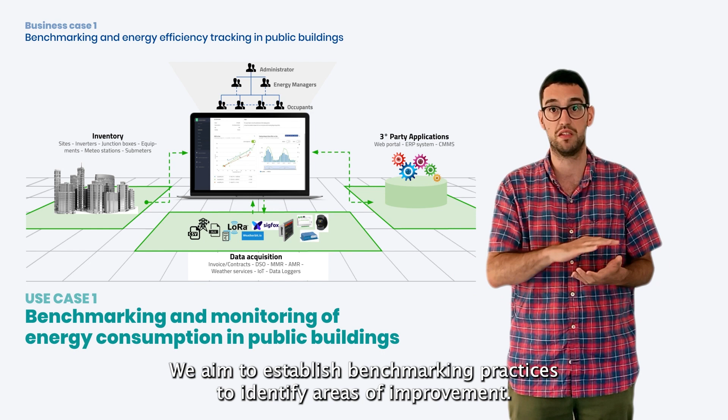To achieve our objectives, we have divided the goals of this business case into two different use cases. Use case 1 is called benchmarking and monitoring of energy consumption in public buildings, in which we compare buildings based on their energy consumption. We aim to establish benchmarking practices to identify areas for improvement.

Use case 2 is about energy efficiency measure registration and evaluation. Here, our focus is on building a repository of energy efficiency measures to evaluate their impacts on achieving energy savings. We want to ensure that the implemented measures yield the desired results.

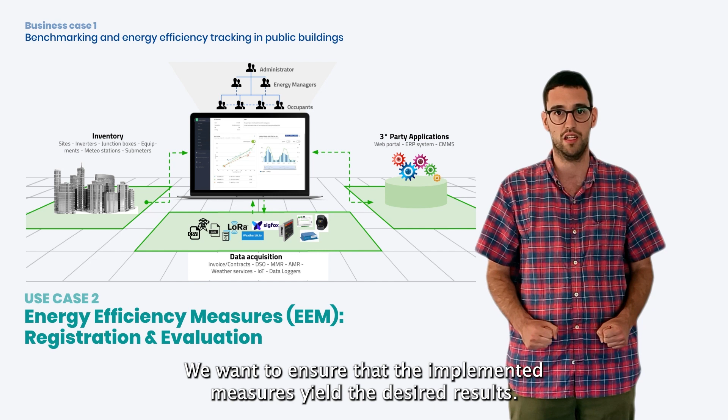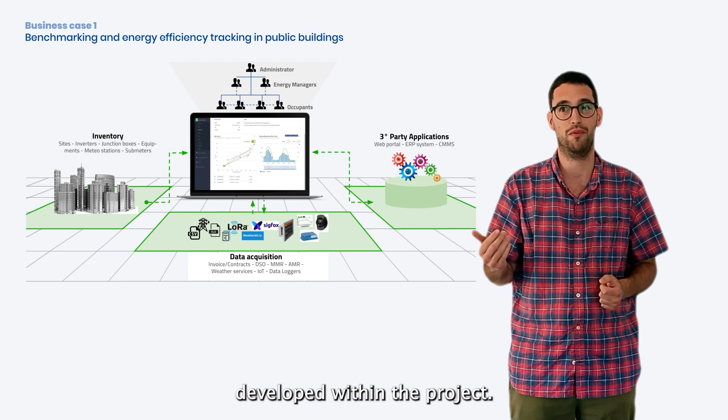Key features of these business cases include an open big data infrastructure to consolidate all building data in a single location and enable performance monitoring, building energy benchmarking utilizing the data developed within the project, and continuous data collection from various sources, including energy consumption, investment in energy efficiency measures, and user information.

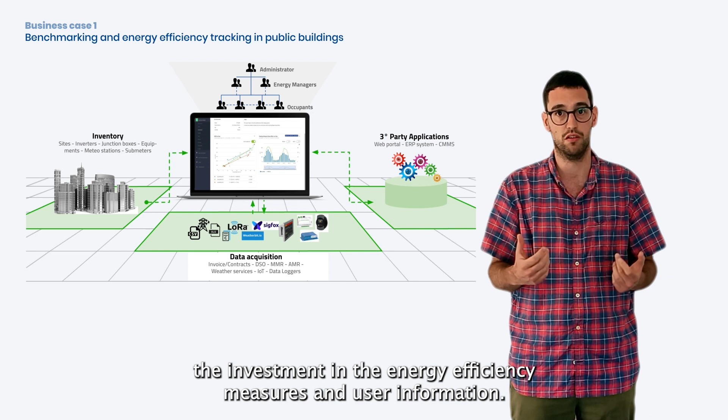The main actors who interact with the energy management tool are around 100 energy managers.

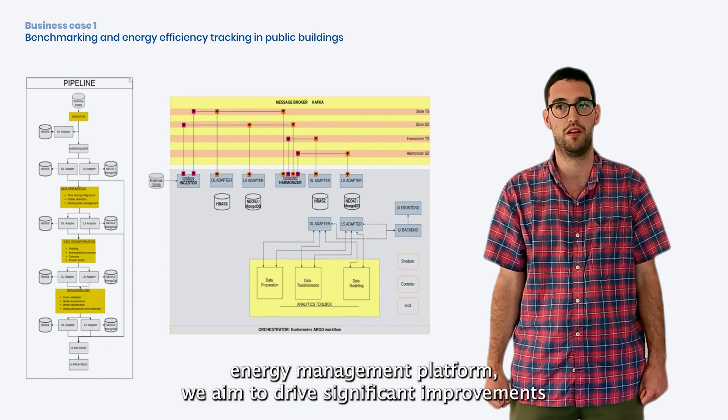By leveraging these resources and implementing our comprehensive energy management platform, we aim to drive significant improvements in energy efficiency within the public sector of the Catalan Government. Thank you for joining us on this journey towards more sustainable and efficient buildings.

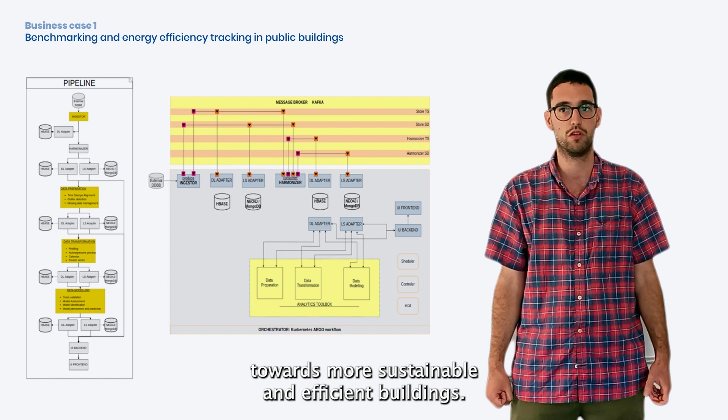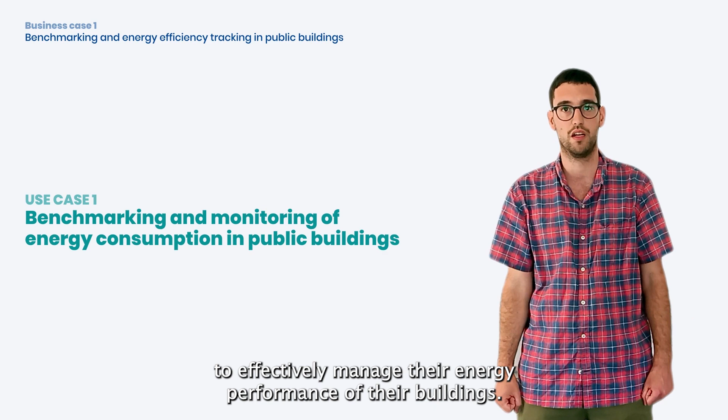In this use case, the overall objective is to provide public authorities and energy managers with a platform equipped with automatic tools to effectively manage the energy performance of their buildings. The key target is to process a significant amount of data from various databases and sources, providing qualified and useful information to enhance decision-making processes in building energy management.

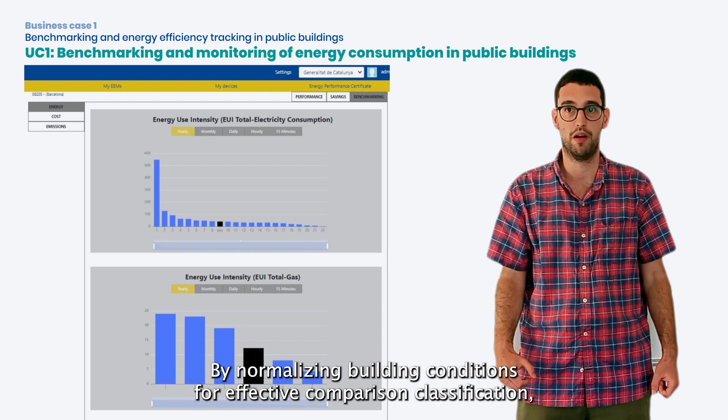One of the tools offered is energy performance benchmarking. By normalizing building conditions for effective comparison and classification, energy managers and public authorities can monitor the energy performance of their buildings and gain insights into why some buildings consume more or less under similar conditions.

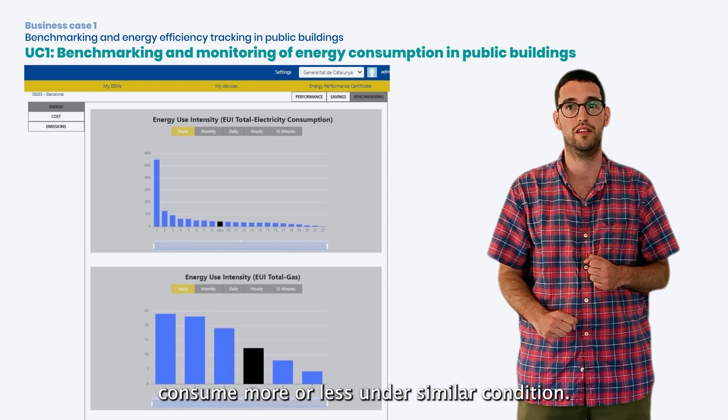Another valuable tool is the analysis of trends in building energy performance. This feature showcases the evolution of building performance indicators, enabling energy managers to track improvements or worsening trends over time. It helps evaluate the real impacts of energy efficiency measures and identify and rectify any deteriorating situations within a building.

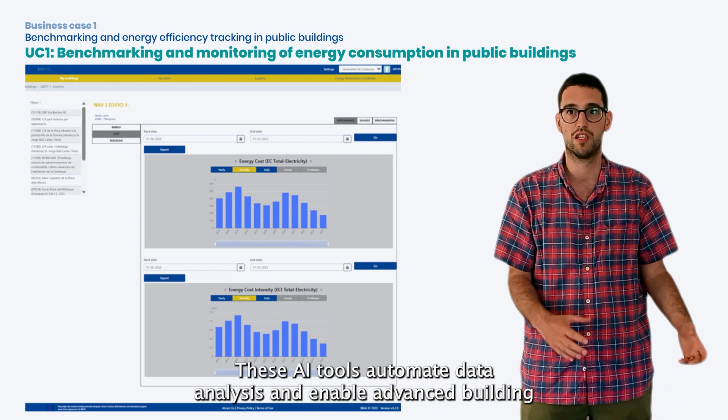A centralized data repository has been created to improve buildings' energy management. This repository includes energy consumption data, building properties, energy performance certificates, and more. This data feeds into AI tools developed during the BIGG project, which automate data analysis and enable advanced building benchmarking, simplifying decision-making processes for energy managers.

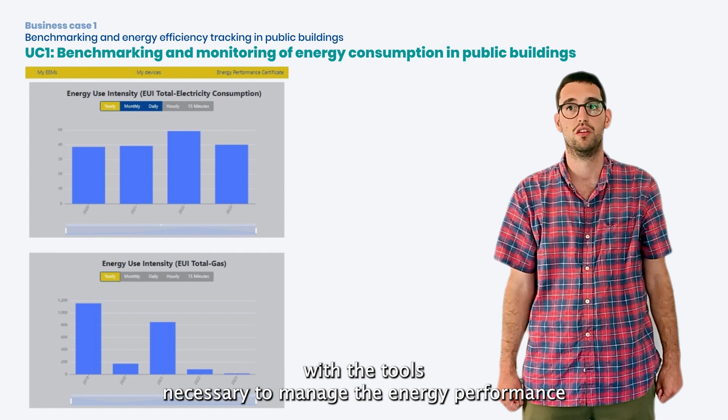Through the BIGG project, this technical solution empowers public authorities and energy managers with the tools necessary to manage the energy performance of their public buildings more efficiently and effectively.

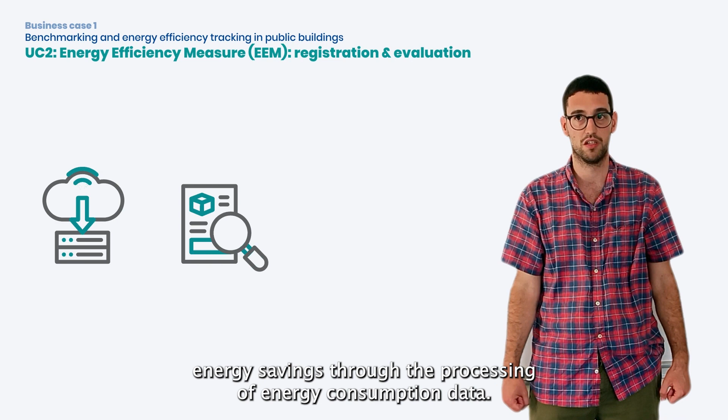In this case, our primary goal is to build a structured database that stores energy efficiency measures and evaluates their impact on achieved energy savings through the processing of energy consumption data. This database also includes an easy-to-interact interface for building and energy managers.

By implementing this database, we expect to obtain more detailed information on energy efficiency measures by registering the data in a structured manner. This will enable us to capture and map information on improvement actions, enhance statistical analysis of registered energy efficiency measures to extract valuable insights for informed decision-making, and improve the accuracy of savings evaluation.

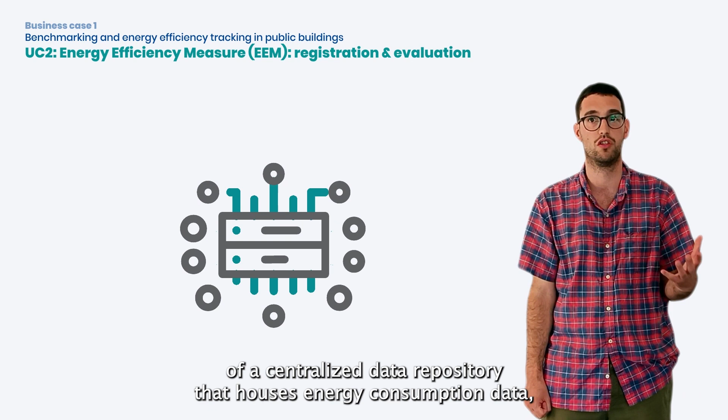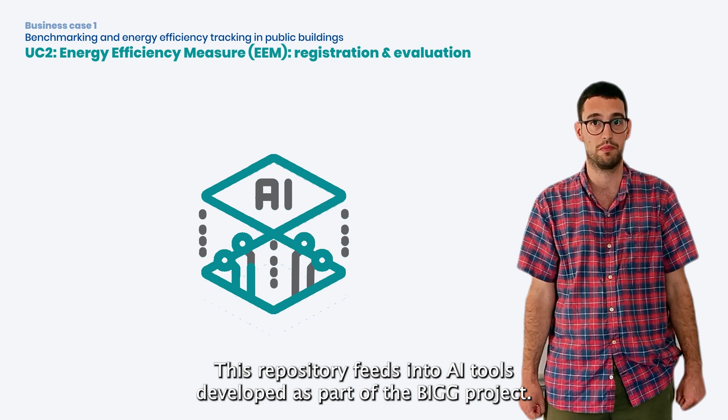To achieve this objective, our technical solution involves the creation of a centralized data repository that houses energy consumption data, building properties, energy performance certificates, and other relevant information obtained in use case 1. This repository feeds into AI tools developed as part of the BIGG project, which automate data analysis and enable advanced building benchmarking, facilitating decision-making for building and energy managers.

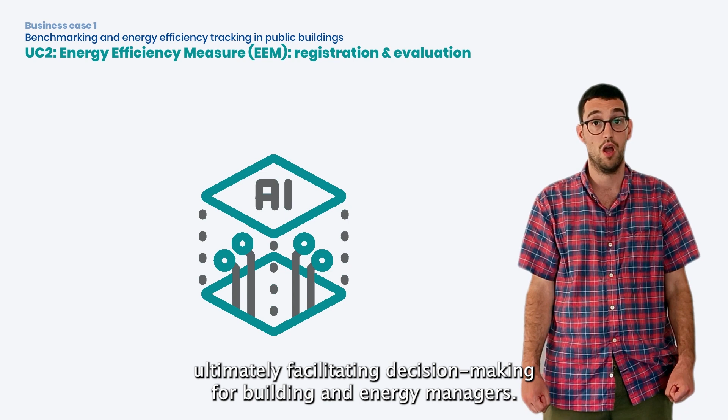We are proud to share that our project has already made significant progress in how information is gathered, stored, and processed. This progress is particularly evident in the case of energy efficiency measures data collection.

Our organization, ICAEN, is responsible for promoting and tracking energy savings in publicly owned buildings, mainly of the Catalan Government and the depending public entities.

Previously, gathering this data was a daunting task that involved handling hundreds of energy managers, encouraging them to provide the data and ensuring that they recorded it properly. Before the BIGG project, the best solution we had relied on a large Excel file, where managers filled in various columns with limited mandatory requirements.

This approach had its limitations, as users had the flexibility to input data based on their capabilities and time constraints. As a result, there was a significant margin of error, and data had to be extensively cleaned and merged by ICAEN to obtain a comprehensive overview of the implemented actions across the Catalan Government.

However, with the implementation of the BIGG project, we have developed a platform that revolutionizes the way data is collected and managed. The platform allows users to register buildings, record energy efficiency measures implemented in those buildings, and browse existing measures. It has become a powerful tool for ICAEN to prompt energy managers to record their actions accurately.

With this platform, data is automatically associated with the respective building and assigned to the correct entities within the Catalan Government. This eliminates the need for extensive data cleaning and post-processing by ICAEN, saving countless hours of work.

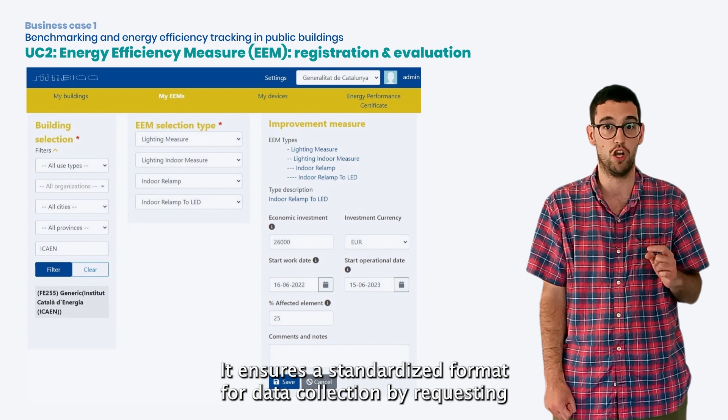Moreover, the platform minimizes data loss by providing an easy-to-use system that is continuously accessible for energy managers to log data. It ensures a standardized format for data collection by requesting only essential information when recording new measures.

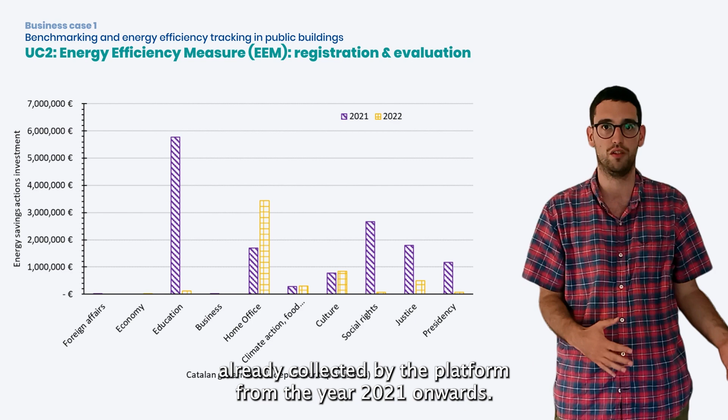Now let's take a look at this figure, which showcases the results already collected by the platform from the year 2021 onwards. These results are aggregated by the departments of the Catalan Government, giving us valuable insights into the progress made in energy efficiency measures across different sectors.

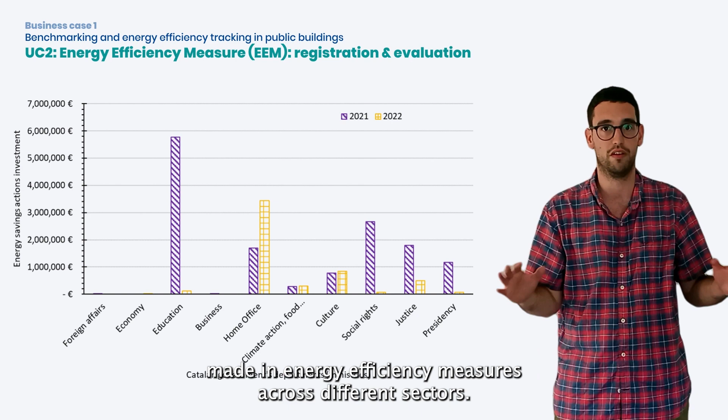Thank you for joining us on this journey towards more efficient and sustainable energy management within the Catalan Government.